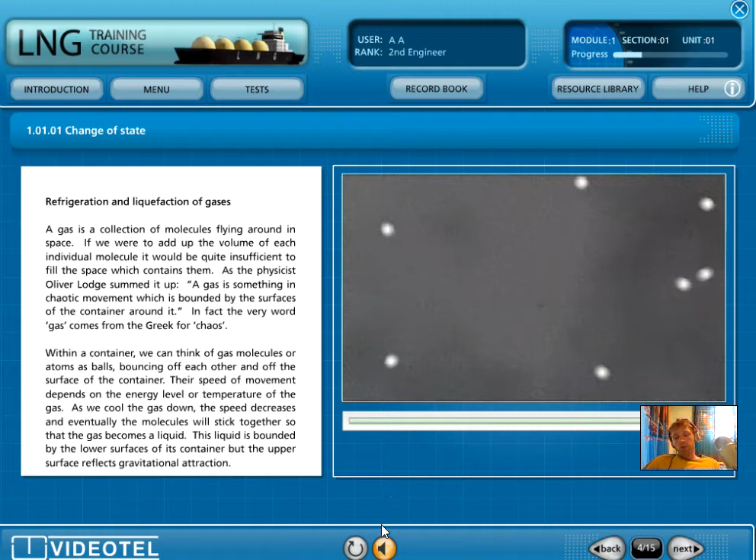First of all, let's begin our lesson again, our training course, and I will start from where we finished. So I will press again the button, so we have the description of the molecules and we will see the movement, how they interact with each other.

A gas, refrigeration and liquefaction of gases. A gas is a collection of molecules flying around in space. If we were to add up the volume of each individual molecule, it would be quite insufficient to fill the space which contains them. As the physicist Oliver Lodge summed it up, a gas is something in chaotic movement, which is bounded by the surfaces of the container around it. In fact, the very word gas comes from the Greek for chaos.

Within a container, we can think of gas molecules or atoms as balls, bouncing off each other and off the surface of the container. Their speed of movement depends on the energy level or temperature of the gas. As we cool the gas down, the speed decreases, and eventually the molecules will stick together so that the gas becomes a liquid. This liquid is bounded by the lower surfaces of its container, but the upper surface reflects gravitational attraction. So we have a description of these gases.

Also, gases can form in the tanker vessels, on the surface, on the top. So it also interacts with the temperature. As the temperature decreases, there is less pressure produced inside the tanks, and as the temperature increases, we can see the pressure inside the tanks increase, due to expansion and due to more movement of these molecules.

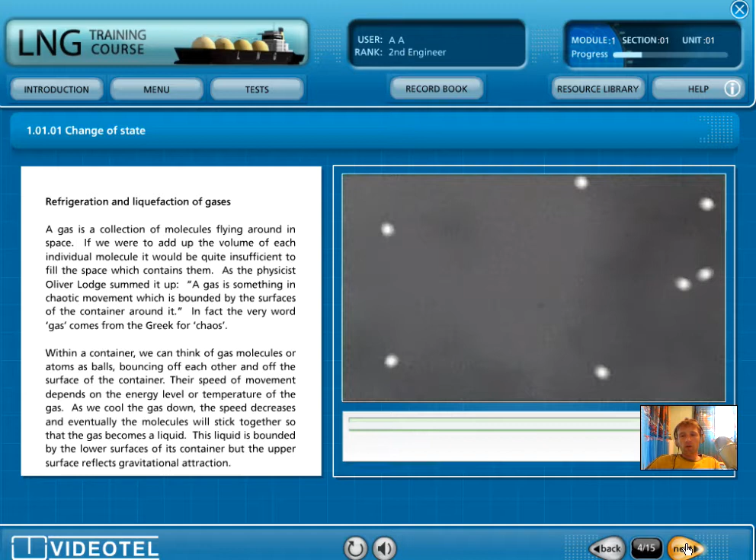So let's continue next. So, by condensing a volume of gas and turning it into a liquid, we can reduce its volume many hundreds of times. This is the basis of transporting gases in liquid form. For example, propane gas occupies approximately 250 times the volume of propane liquid at 15 degrees Celsius. The ratio of gas to liquid volume for LNG is about 600 to 1. So we can confirm how much the volume will be reduced as the gas is cooling down.

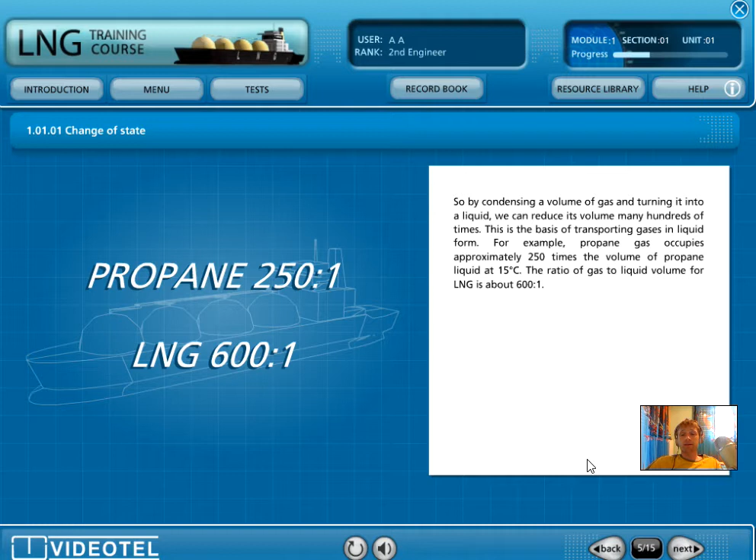Once natural gas has been extracted from its underground reservoir, it then has to be processed and prepared for transportation. The processing consists of removing the heavier hydrocarbons and non-hydrocarbon constituents to produce natural gas that is fit for liquefaction or use as a fuel. Some of the ethane, propane, butane and pentanes that have been removed may be used elsewhere. Known as natural gas liquids, NGLs, they are valuable byproducts of natural gas processing.

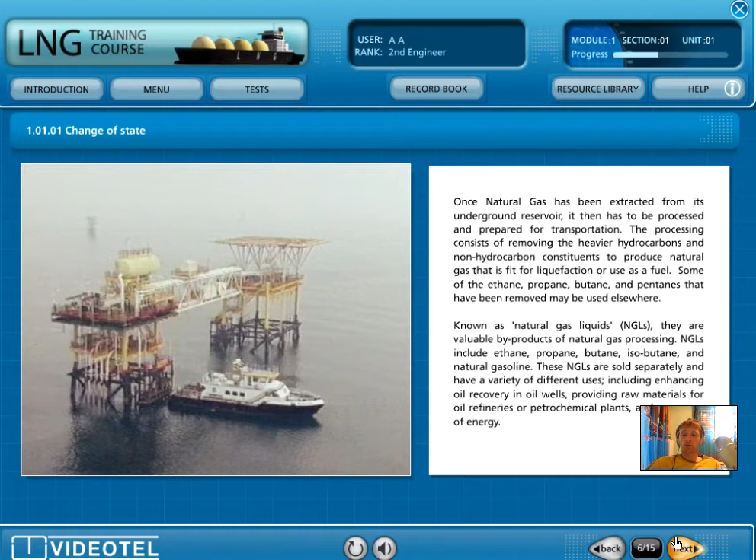NGLs include ethane, propane, butane, isobutane, and natural gasoline. These NGLs are sold separately and have a variety of different uses, including enhancing oil recovery in oil wells, providing raw materials for oil refineries or petrochemical plants, and as sources of energy. So we have seen, after natural gas has been extracted, how the processing takes place and where they are used, and let's continue to another page.

This LNG liquefaction plant is one of the most common in use today. The system uses refrigeration by mixing cooling fluids and pre-cooling with propane. The process utilizes two cooling circuits. The first uses propane as a cooling fluid, and the second a mixture of ethanol, propane, methanol, and nitrogen. The composition of the mixture of coolants is based on the composition of natural gas in the plant.

After passing through the pre-treatment systems, the natural gas is cooled in a propane vaporizer. The pressure of the propane is adjusted to maintain the least possible temperature in the natural gas, so as to avoid condensation.

The gas then enters the main cryogenic interchange, which cools the natural gas through a closed circuit of mixed coolants. The current of refrigerants is cooled at the compressor's exit using seawater, and then by propane in evaporators with high, medium, and low temperature.

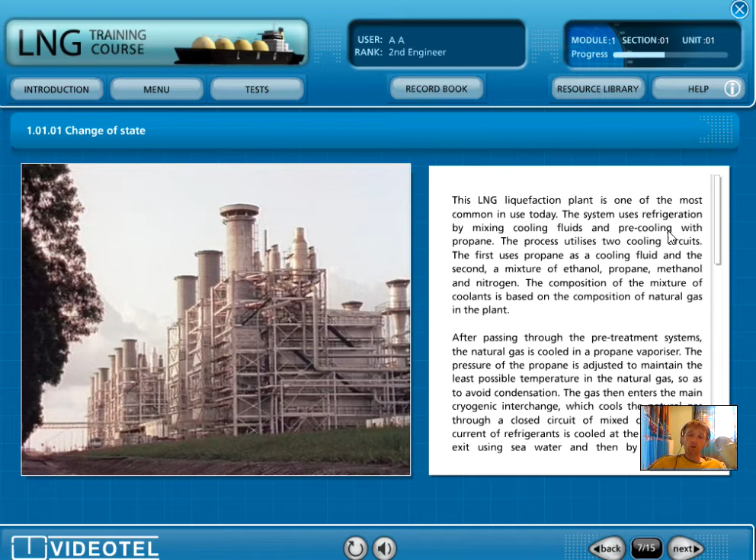So we can see that we have this liquefaction plant, which stage by stage will cool down the gases. And then, by cooling down, we'll reduce all this volume as much as possible, and it will be easier to transport all these liquefied gases.

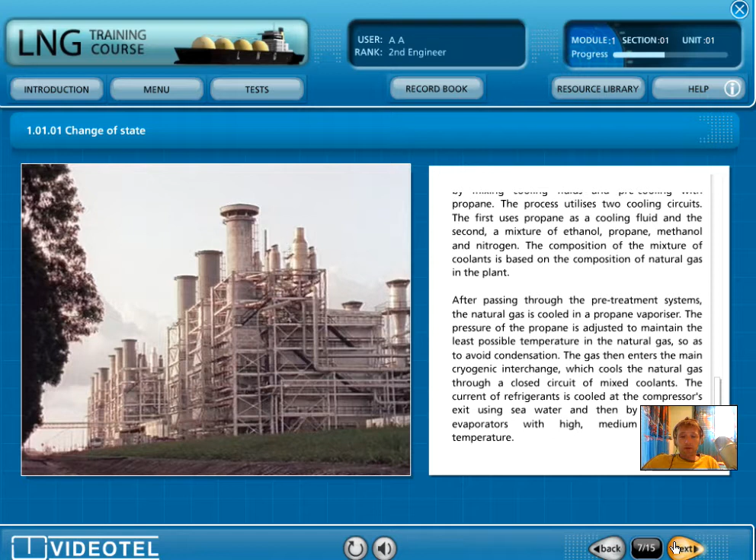After liquefying the natural gas, it is subcooled and stored. The liquefied natural gas is partially subcooled so that it produces the least amount of vapor in the tank filler, followed by an expansion to a slightly higher pressure than atmospheric. The flash gas generated during the expansion, together with the gas coming from the evaporation in the tanks, is used as fuel for the plant's gas turbines.

Subcooling involves cooling the liquefied natural gas to below the saturation temperature. By their very nature, refrigerants must be volatile substances. The liquid is nearly always at a balanced, saturated state with any vapor present. When the liquefied natural gas loses any pressure or gains any temperature, some of it will be flashed to vapor to reach a new balance.

There must be a higher pressure upon entry into the liquid line than at its exit. Otherwise it will not move in the line. This inherent pressure drop always creates flash gas, no matter how much liquid is available at the start of the line. This is aggravated by friction losses, fitting restrictions, and any rises in elevation.

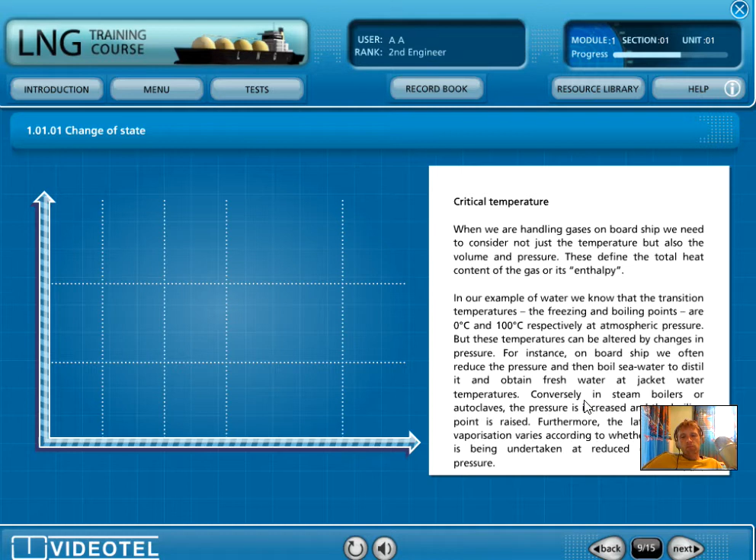So let's continue to the next page. Critical temperature. When we are handling gases on board ship, we need to consider not just the temperature, but also the volume and pressure. These define the total heat content of the gas, or its enthalpy.

In our example of water, we know that the transition temperatures, the freezing and boiling points, are 0 degrees Celsius and 100 degrees Celsius respectively at atmospheric pressure. But these temperatures can be altered by changes in pressure. For instance, on board ship, we often reduce the pressure and then boil seawater to distill it and obtain fresh water at jacket water temperatures.

Conversely, in steam boilers or autoclaves, the pressure is increased and the boiling point is raised. Furthermore, the latent heat of vaporization varies according to whether the boiling is being undertaken at reduced or increased pressure.

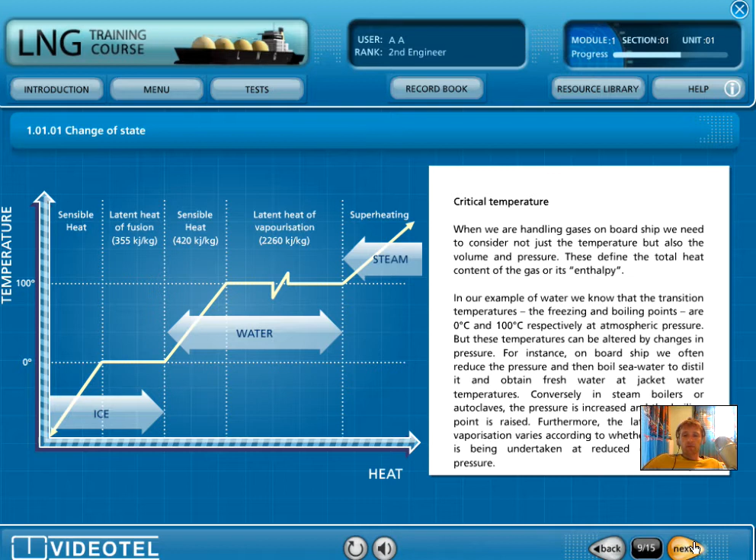So there is a lot of information that we need to know, that is sure. Always take your time to understand what it is talking about; it's really important to see these parameters. So let's move on to the next page.

When the relationships of enthalpy against pressure are plotted on a chart, the resulting diagram is known as a Mollier chart. This is an essential aid to understanding what may happen when we liquefy or condense cargo gases. A simplified version of a Mollier chart is shown. The diagram plots the enthalpy along the x-axis and the absolute pressure on the y-axis.

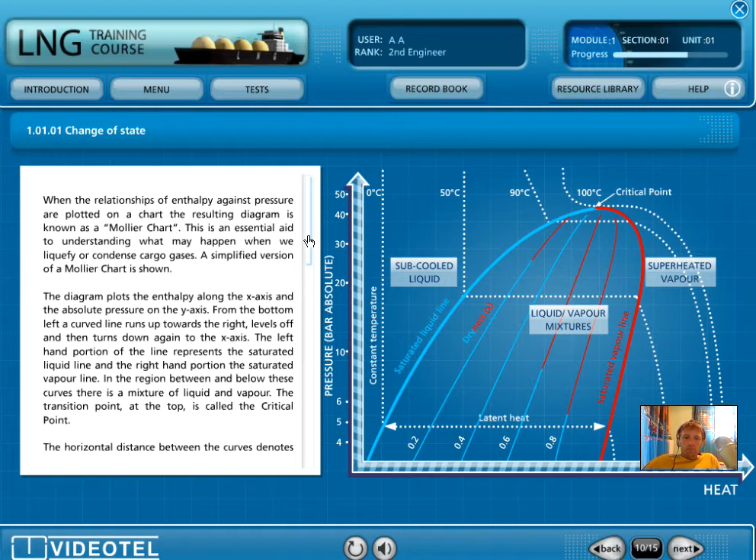From the bottom left, a curved line runs up towards the right, levels off, and then turns down again to the x-axis. The left-hand portion of the line represents the saturated liquid line, and the right-hand portion the saturated vapor line. In the region between and below these curves, there is a mixture of liquid and vapor. The transition point at the top is called the critical point.

The horizontal distance between the curves denotes the latent heat at a particular pressure, and this decreases as the pressure increases until, at the critical point, it becomes zero. So this Mollier diagram is really important. We use it also when we take the second engineer license. Also in the academy you will be taught this diagram. It's really important, and for each gas there is a different Mollier diagram.

So here you can see what is going on, the latent heats. You can see the condition your gas is in, whether it's liquid or vapor. There is a lot of information. There is pressure information, the absolute pressure, and the enthalpy down on the x-axis. So this Mollier diagram is really important to know and to handle.

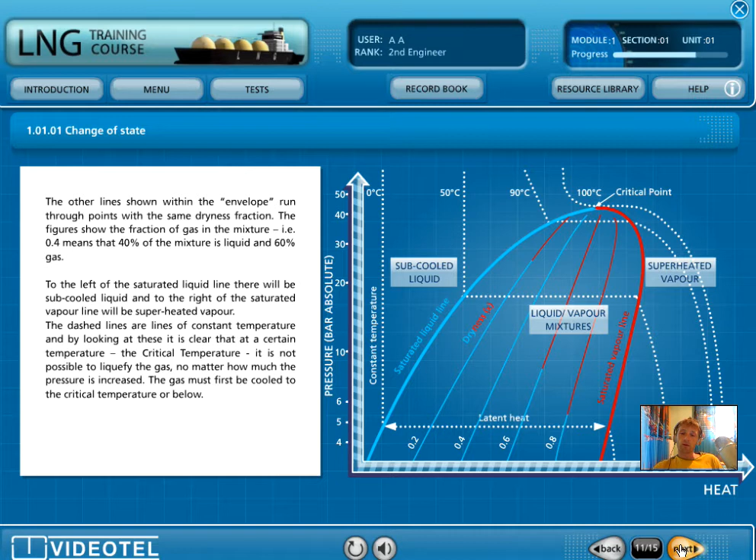So let's move on. As the diagram shows, for some of the cargoes commonly carried, such as ethylene and ethane, this critical temperature is in the ambient range. For LNG, it is well below this. So we have all the gases here. We have saturated vapor pressure and also temperature. As we can see, methane is the coldest, then ethylene, and butane, butylene, vinyl chloride, ammonia, propane are close to zero. So we have the absolute pressure and the temperature, and a comparison of different kinds of gases.

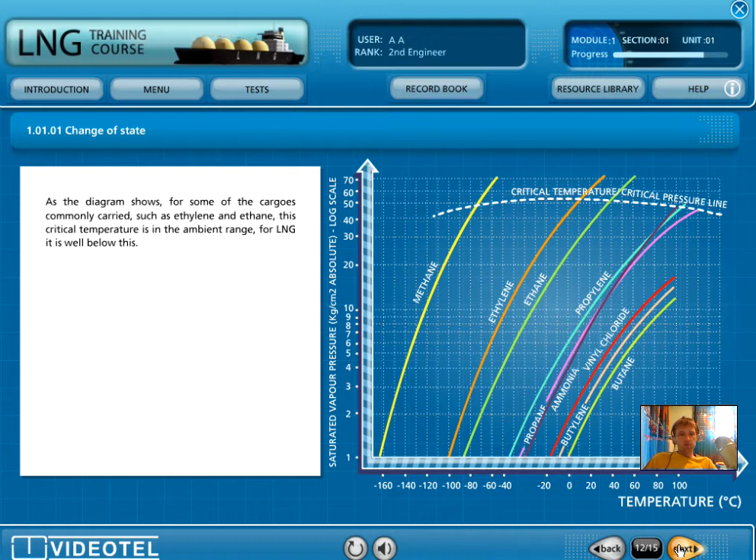Let's move on. Diffusion and mixing of gases. Diffusion is defined as the spreading out of a substance from a concentrated source, which results in an increase in the entropy, degree of disorder, of the substance. Diffusion occurs because of the random movement of molecules of the substance, which allows them to separate from one another. The greater the space between these molecules, the greater their ability to spread out from one another. The more densely packed the molecules are, the less space there is to maneuver, and therefore the more difficult it is for diffusion to occur.

Solids, for example, are composed of very tightly packed particles, and so any diffusion occurs extremely slowly. If a lead brick and a gold brick were wrapped together in close contact, it would take several years before the two bricks were glued together. The atoms are able to diffuse into each other's solid matrix, causing them to adhere to one another, but only after several years of contact with each other's surface.

Very interesting to see how the molecules interact in diffusion, and the more solid, the more difficult it is. As you heard, it takes a lot of years. It's really interesting to hear that. And also, the greater the space between the molecules, the greater their ability to spread out from one another.

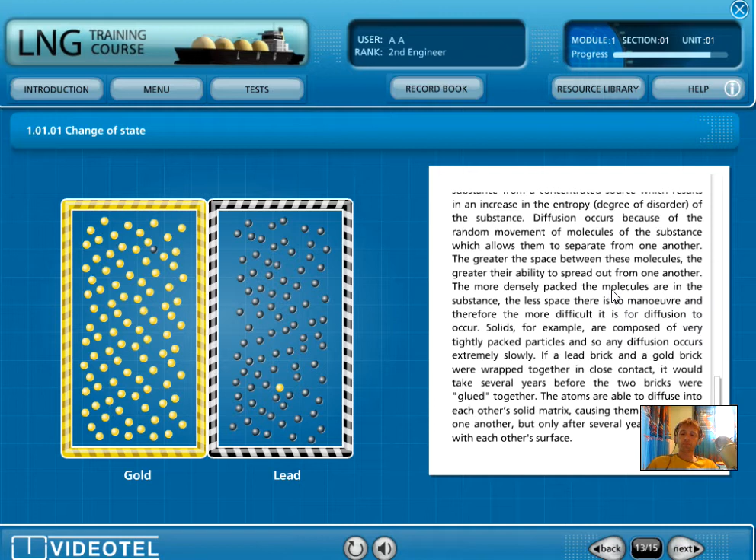Gaseous substances are in a different league again. The gas molecules are much more distant from one another than is the case in liquids or solids. That is why gases are transparent. Light can pass through the relatively large spaces between the gas molecules without any distortion.

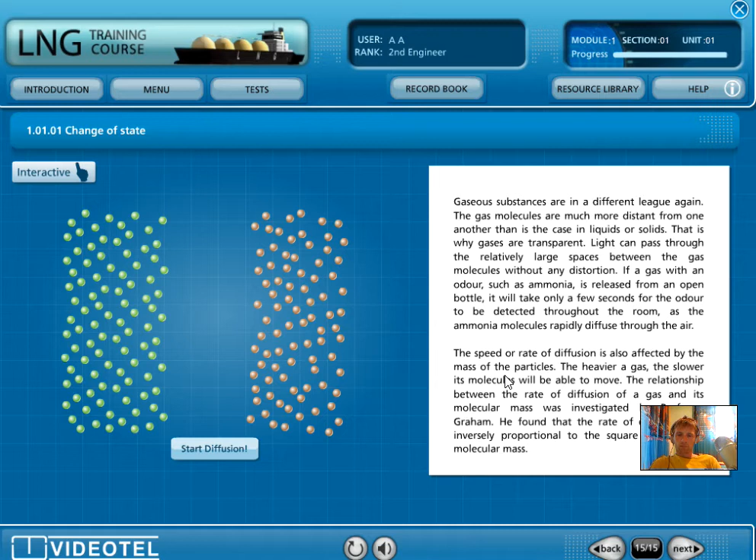If a gas with an odor, such as ammonia, is released from an open bottle, it will take only a few seconds for the odor to be detected throughout the room, as the ammonia molecules rapidly diffuse through the air. The speed or rate of diffusion is also affected by the mass of the particles. The heavier a gas, the slower its molecules will be able to move. The relationship between the rate of diffusion of a gas and its molecular mass was investigated by Professor Graham. He found that the rate of diffusion was inversely proportional to the square root of the molecular mass.

Very interesting to see that. Okay, start diffusion. It will be really fast, and the rate of diffusion was inversely proportional to the square root of the molecular mass.

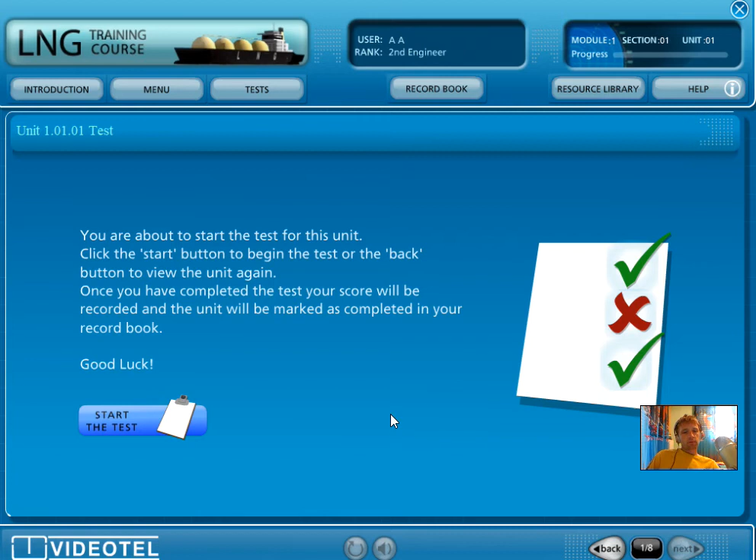So here we are. We have finished all the section, and you're about to start the test for this unit. Click Start button to begin the test, or the back button to view the unit again. So I will take the test, and you will be here to check also with me the results. When one volume of liquefied gas LNG evaporates, roughly how many volumes of gas will be produced? I will answer 600.

Next. What is the term used to define the total heat content of gas? Total heat content of gas. It is enthalpy. So, is the statement about liquid cargoes true or false? The pressure exerted by boiling liquid vapor of gas within a closed container at a given temperature is known as SVP, saturated vapor pressure. Okay, we'll answer true.

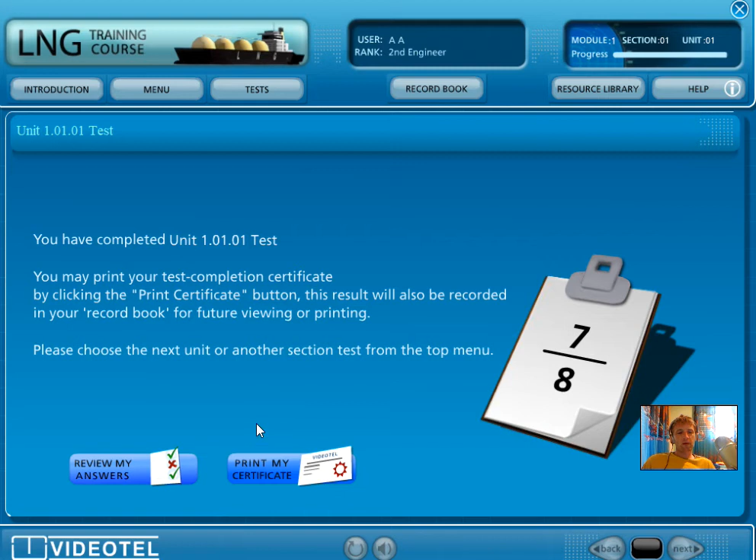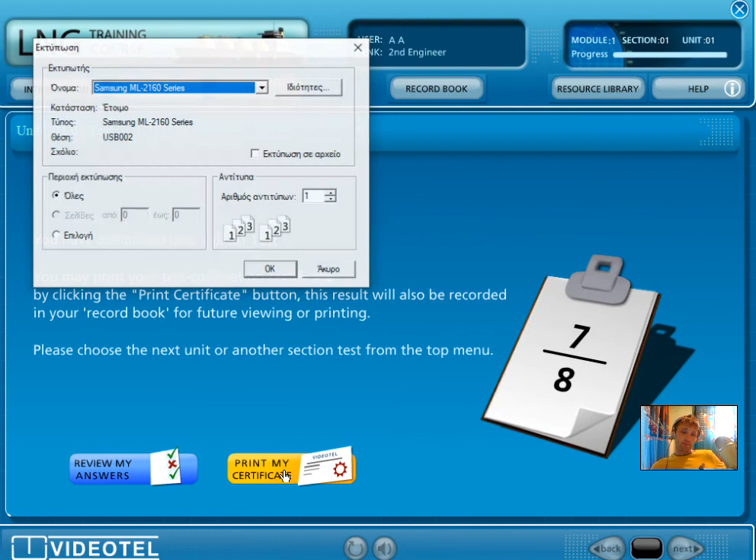So let's see. I made one mistake. I'd like to review all the answers. It was false. The critical temperature for methane is in the ambient range. No, it's not in the ambient range. So this was my mistake, and I believe it's not so bad. It seems that these tests really help. So I will go to main menu. We have finished fundamental knowledge and understanding of physics and chemistry. There is a lot of things here.

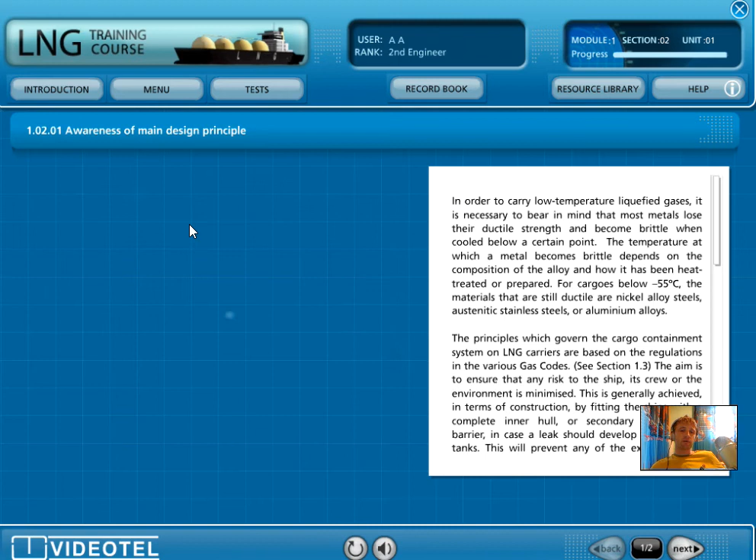Awareness of main design principle. In order to carry low temperature liquefied gases, it is necessary to bear in mind that most metals lose their ductile strength and become brittle when cooled below a certain point. The temperature at which a metal becomes brittle depends on the composition of the alloy, and how it has been heat treated or prepared. For cargoes below -55 degrees Celsius, the materials that are still ductile are nickel alloy steels, austenitic stainless steels, or aluminium alloys.

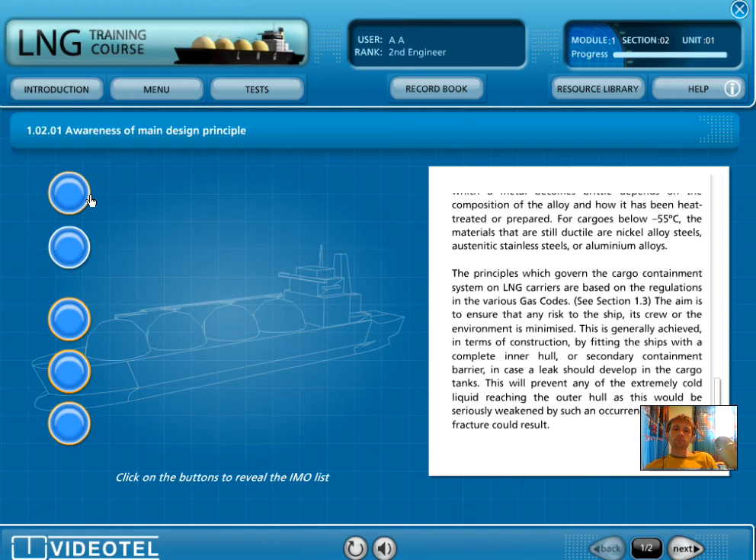The principles which govern the cargo containment system on LNG carriers are based on the regulations in the various gas codes. See Section 1.3. The aim is to ensure that any risk to the ship, its crew, or the environment is minimized. This is generally achieved, in terms of construction, by fitting the ships with a complete inner hull, or secondary containment barrier, in case a leak should develop in the cargo tanks. This will prevent any of the extremely cold liquid reaching the outer hull, as this would be seriously weakened by such an occurrence and brittle fracture could result.

So we can see here how important it is to be aware of the main design, how it must be properly taken care of by the regulations. And if such a thing can occur, just imagine what damage it can do to the hull structure and what other damage it can cause to the vessel itself, if it's traveling in rough sea or something else.

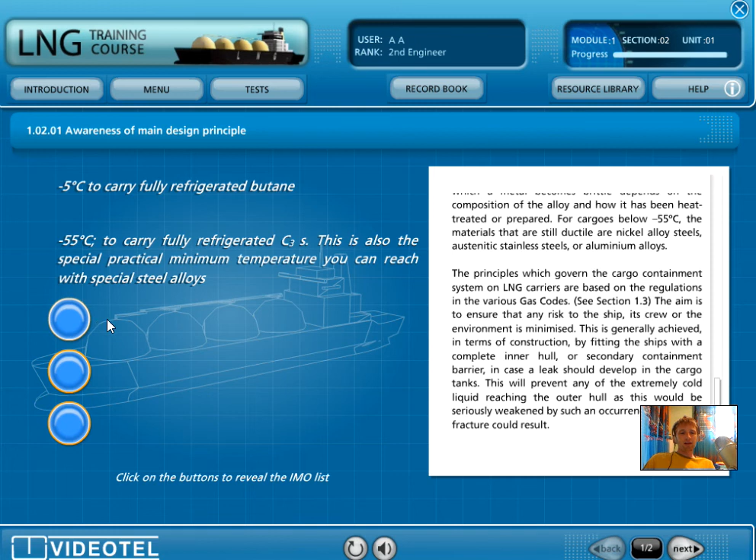So let's see also this section today. Let's press these buttons. -5 to carry fully refrigerated butane, -55 to carry fully refrigerated C3s. This is also the practical minimum temperature you can reach with special steel alloys. -105 to carry fully refrigerated ethylene, -165 to carry LNG, -196 for systems using liquid nitrogen, mostly inert gas systems.

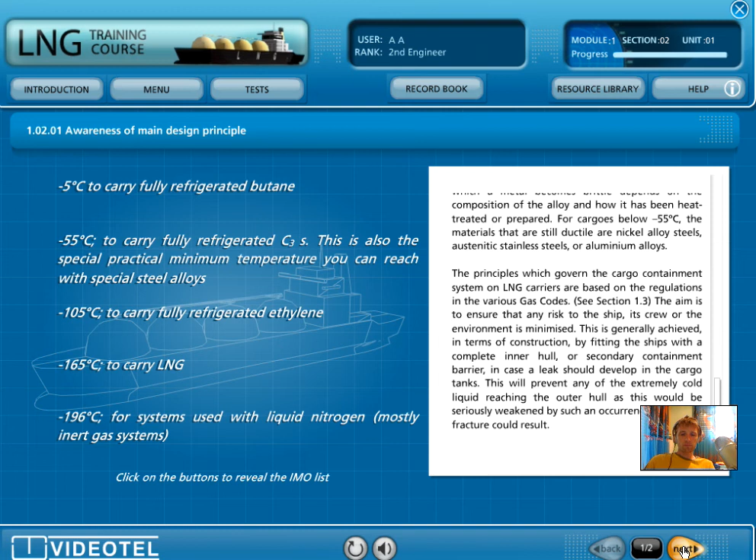Various types of tank system have been developed to meet these requirements, and these will be considered in more detail in Module 2. Leak detection and alarm systems are also required. Damage survival requirements are also a major feature of the gas code. Gas carriers must be able to withstand a far greater degree of damage than an oil tanker.

The intent is that the ship should survive flooding after hull damage caused by an external force. Measures could then be taken to salvage the cargo or the ship, or to remove the danger to the surrounding area by other means. Cargo tanks must also be located a specified distance inboard from the hull to protect them from minor damage, such as contact with a tug or jetty, or from the effects of collision or stranding. More details may be found in the next unit.

Very, very interesting. Also on the previous page I was thinking that for sure there must be fitted some kind of detection system, alarm system, which notifies the personnel involved in these operations that there is some kind of leakage, or some alarm which shows how serious the leakage or the damage is on the hull or some compartment or the cargo tanks or cargo holds.

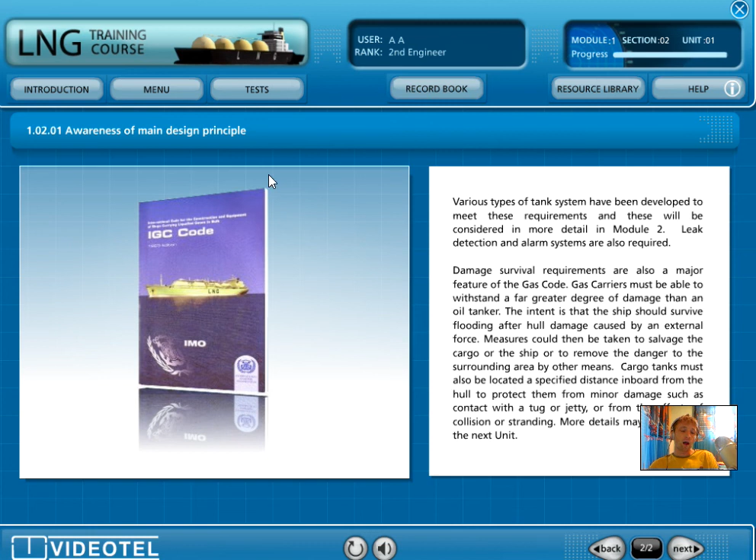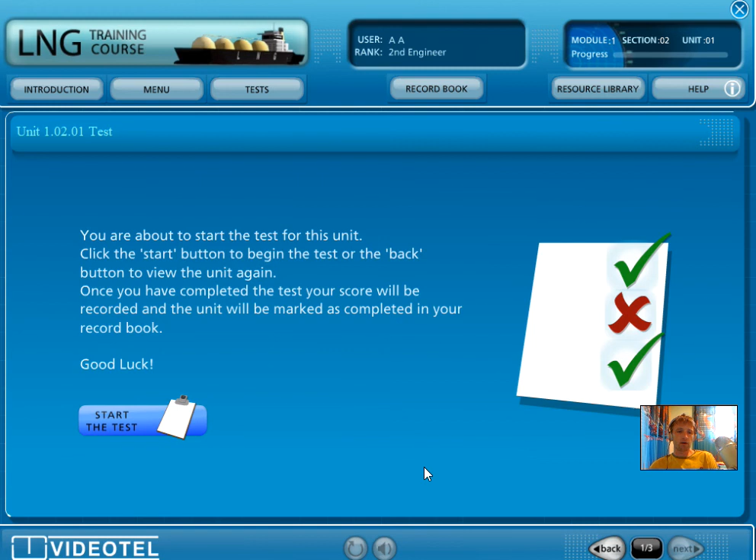So I will go back to the menu, fundamental knowledge, okay, principle of design. We have awareness of main design. Let's check in order to carry various types. And okay, at the end we have a test. Okay, we will start the test.

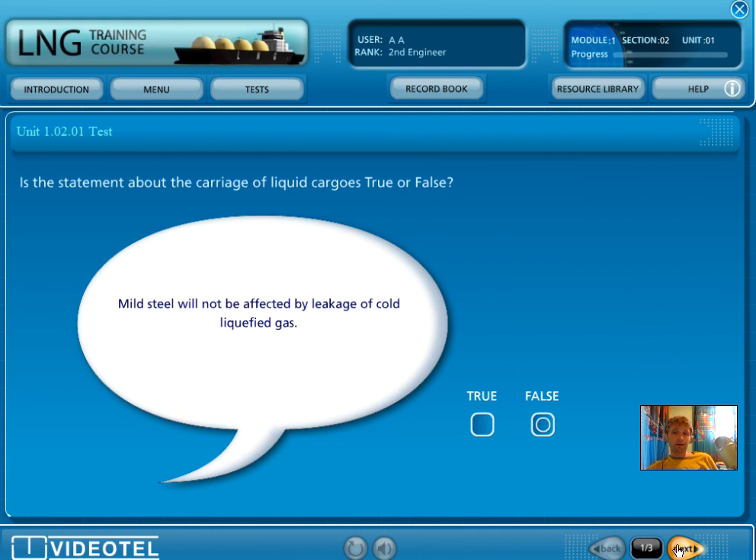Is the statement about the carriage of liquid cargoes true or false? Mild steel will not be affected by leakage of cold liquefied gas. Mild steel for sure will be affected, so we will press false, because mild steel is not so strong a material. We need some special alloys, as we have seen previously, and only those special alloys, which include nickel, or some different kind of materials will withstand these conditions.

So as you can see, the LNG tankers have much more protection than tankers, because as we know, if something happened, it's like ten bombs like those dropped on Nagasaki and Hiroshima. So just imagine how much damage this kind of ship can cause, and for sure the security and safety of this kind of ship must be increased as much as possible, and all the factors and all the risks will be eliminated from the beginning, from the construction of the ship.